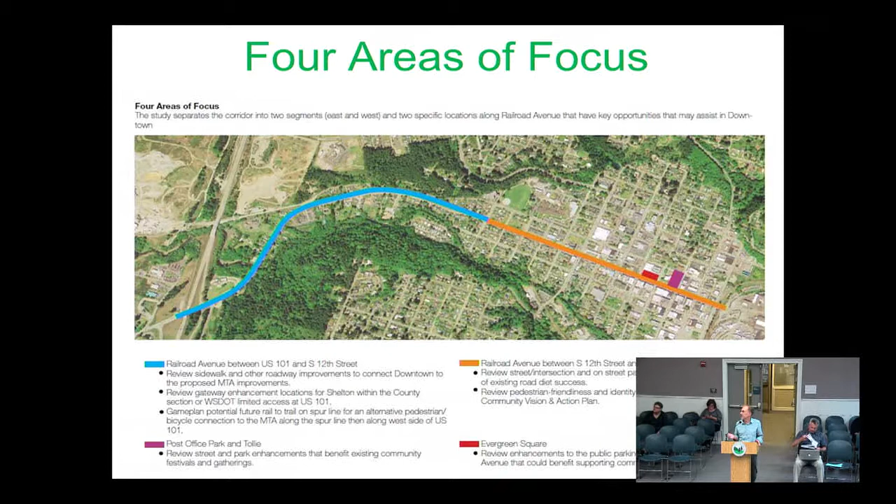So the first section, taking us from the Park and Ride on the other side of 101 to 12th, was an exercise in trying to figure out, with limited right-of-way, how we can make some multimodal improvements. I want to go through some of the things we looked at.

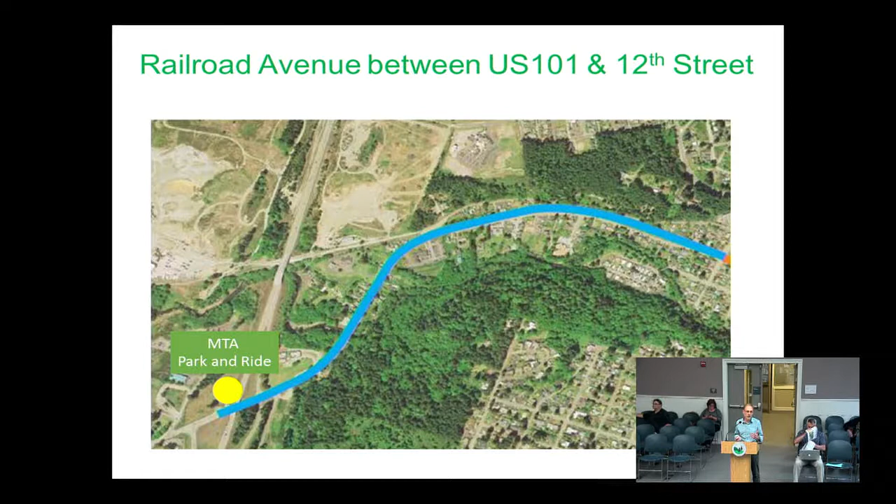There was also an additional layer of items we looked at: wayfinding along US 101, a gateway design near Deegan for visitors getting off the road and getting oriented to Shelton and downtown Shelton, pedestrian and bicycle facilities, and we also looked at the spur line from a multimodal point of view.

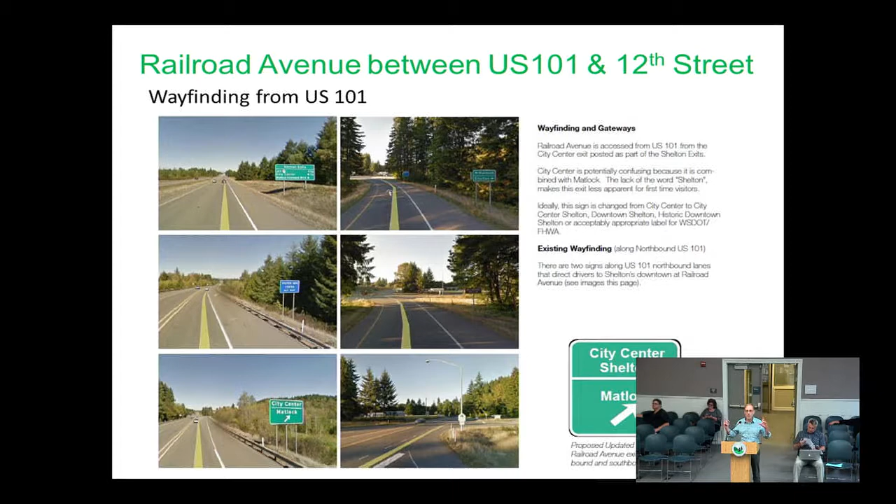What we discovered, and everybody kind of knows this within the community, is that when you're passing on 101 from north or south, there are three exits that are miles ahead of the actual entrances. In this bottom left image, there's a city center sign with a white line, and underneath that, Matlock. It isn't quite apparent that city center means Shelton.

Now, the WSDOT has, in multiple places, 'city center' plus the name of the community. So we did a little graphic on the bottom right-hand corner of this slide that says 'City Center Shelton,' and we think that would really help in understanding that you're heading to downtown Shelton.

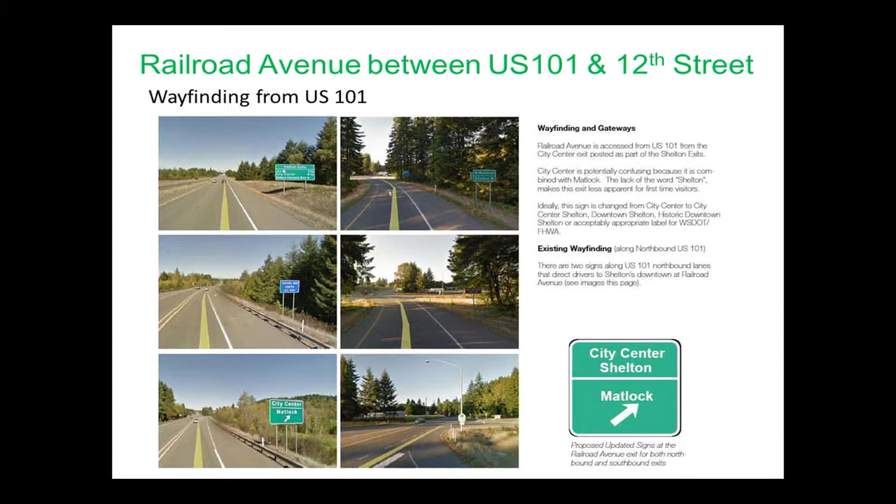Another thing we looked at is once you get off the off-ramp and head up Railroad Avenue to town, there's a little information kiosk that's been out there for about 20 years or so, right next to Deegan Road. That is a great candidate for a potential gateway sign.

This is county, it's outside the city limits, but it's within the UGA. Exactly. And so at some point this will probably be captured by the community, so why not at least capture it with a gateway sign.

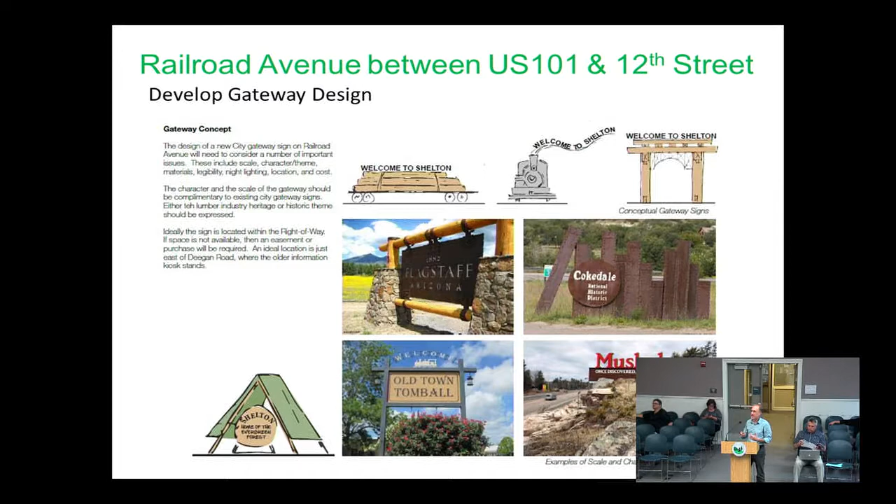For the sake of the study exercise, we wanted to build upon the 3rd Street gateway and explore other possibilities as a long-term project, or it could be short-term, that the community might look at as a means to figure out what a gateway design might be. So we just have some graphics there—no designs yet, just concepts to work with.

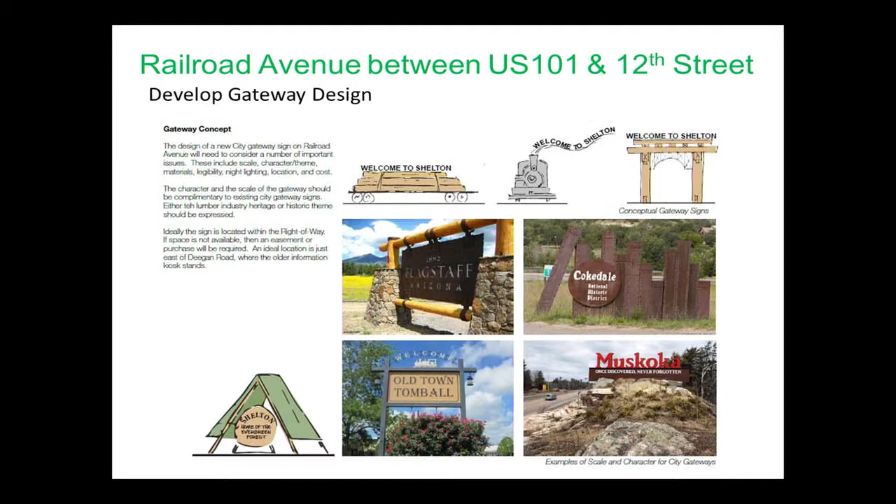And this is the pinch point along the corridor. The right-of-way widens out towards US 101, but a lot of the stretch of roadway is only 40 feet of right-of-way, particularly along the spur line. So it's a very limited amount of area that currently could be improved without having to get easements on either private property or along the spur line.

Actually, let me go back. The dilemma with the bridge, to get bicycle facilities and sidewalks, is that it would require widening the bridge, which would be a big fiscal impact. So for the sake of this study, we tried to keep it within the realm of feasibility, and this is a county section, not the city section.

So when we looked at the big picture with the group, we realized that the spur line—well, first the park and ride is the ideal place to connect. From a multimodal point of view, people could get on their bikes to that location and back. Certainly it's a park and ride lot, but we want to connect all those modes, so we could take a look at the spur line as one possibility. We know right now it's potentially activated for use, and that would be a great use for that corridor. If that wasn't to happen, at least theoretically, the study says that's also a possibility.

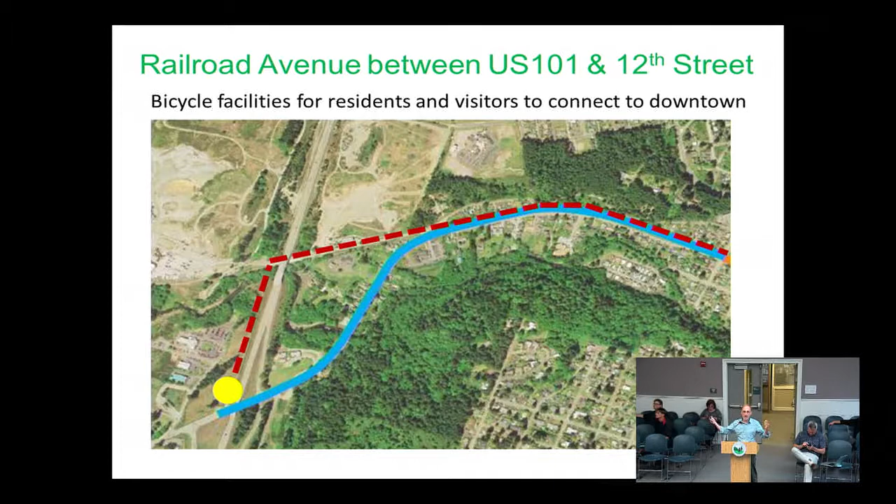There's driveways along Railroad Avenue. Most of the land use is on the south and east, but there's some on the north and west. I've only seen a few pedestrians in my minimal number of trips to the community—I saw a mom with a stroller out there. There is a need for people to walk along the corridor, but there's really no facilities, just meandering shoulders out there.

So we thought, well, what could we fit in here with 40 feet of right-of-way? One thing that became obvious is the potential of a 6-foot sidewalk, in this case on the south side, that connects most of the land uses that are bringing people towards Railroad Avenue, people coming up their drives and driveways.

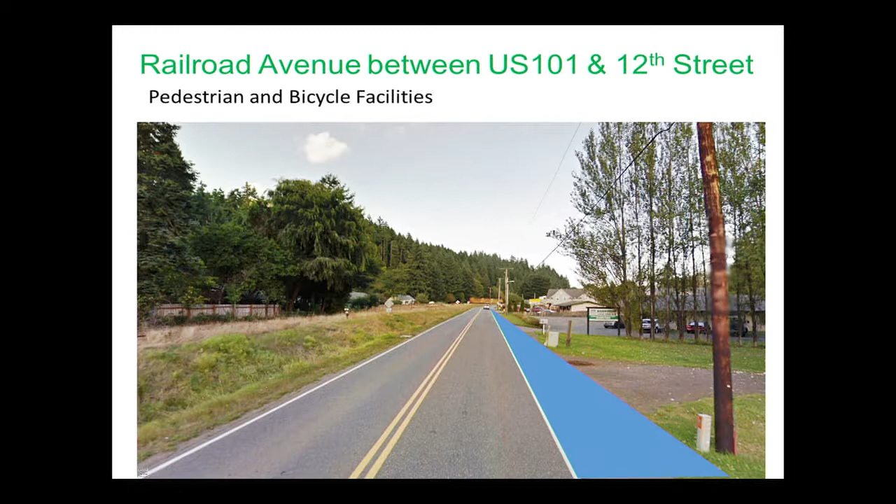And then for the sake of a big picture, long-term vision, doing something if the rail line becomes available 5 or 10 years from now. Working with the county, they're very open to adding minimal bicycle or pedestrian facilities. The bicycle facilities are hard, because if you add those—let's see, even a sidewalk on the other side—your cross section becomes wider than the 40 feet, because you also have to have the utility poles within that space.

So for the sake of the study, we tried to keep it really minimal in terms of improvements. And they support this, and there's actually enough room to not even move the poles to get in a 6-foot sidewalk.

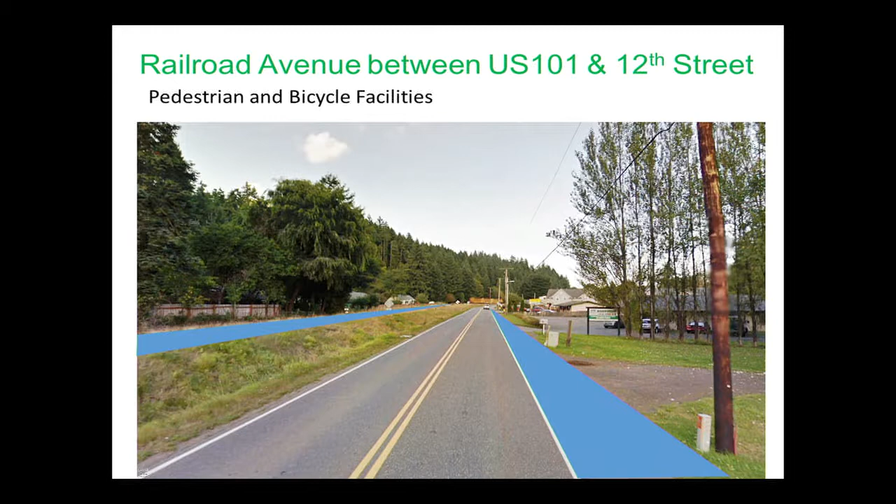There are 2 cross sections here. The top is showing existing conditions. The travel lanes are 10 to 12 feet wide as striped in the county portion. Right now the rail line isn't active, but the potential of it being activated we consider to be a good possibility.

In terms of a long-term plan, if that ever becomes available, you could have a shared use, multi-use path for both pedestrians and bicyclists. That would be used by anybody who wanted to commute, or anybody just visiting for a weekend in Shelton who wants to get out on their bikes to and from. You could do a whole thing with having bikes available for visitors or people coming off the bus with their bikes, whatever kind of scenario.

And then the sidewalk along the south side is what this section's showing, and the trail on the north side. I should back up and mention that there would be potential stormwater improvements that need to happen—you'd probably put curb and gutter where the sidewalk is to have some differentiation. So there are some civil engineering improvements that would need to happen.

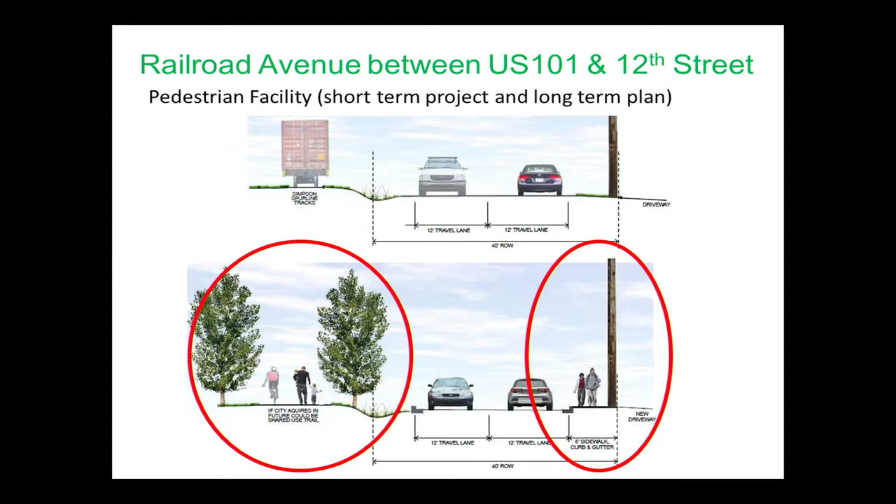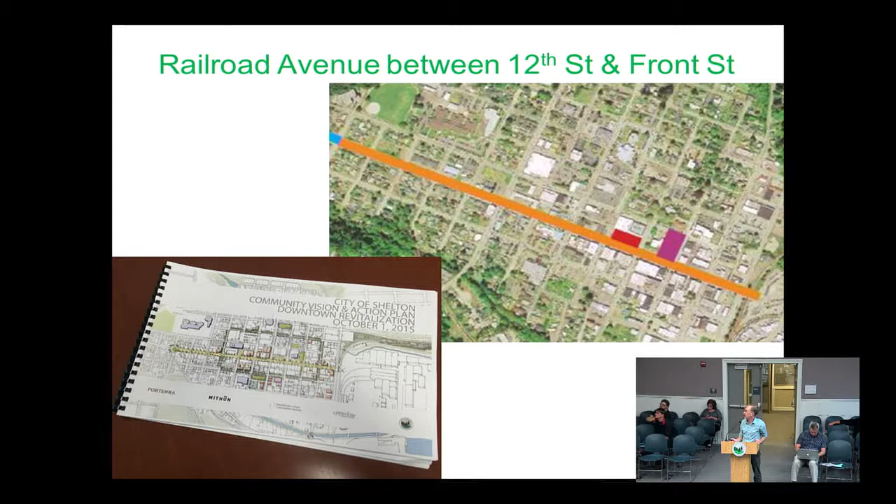All right, now the next section is from 12th to Front Street. Again, we wanted to build on the downtown action plan, and we're also going to talk about Evergreen Square, Post Office Park, and Tollie.

The number one thing we would have recommended, which is also a recommendation of the vision plan, is the road diet. The city successfully restriped Railroad Avenue, and it works just fine—4 lanes to 3 lanes still carries about the same amount of traffic, and it's much safer for pedestrians to cross. You now have additional bike lane space, so it's really a win-win-win for downtown. It would be our number one recommendation for any downtown improvement, and that's our company's focus.

On-street parking was looked at in the initial phase around angle parking, and that was not considered a viable option. Parallel parking is available and that works great. Crosswalks are demarcated in a nice colored painted area, so those are very strong crosswalks now for pedestrians and for vehicles coming down the corridor, so drivers know there could be pedestrians there.

We'll look at enhancements around Evergreen Square and Post Office Park in relationship to community activities.

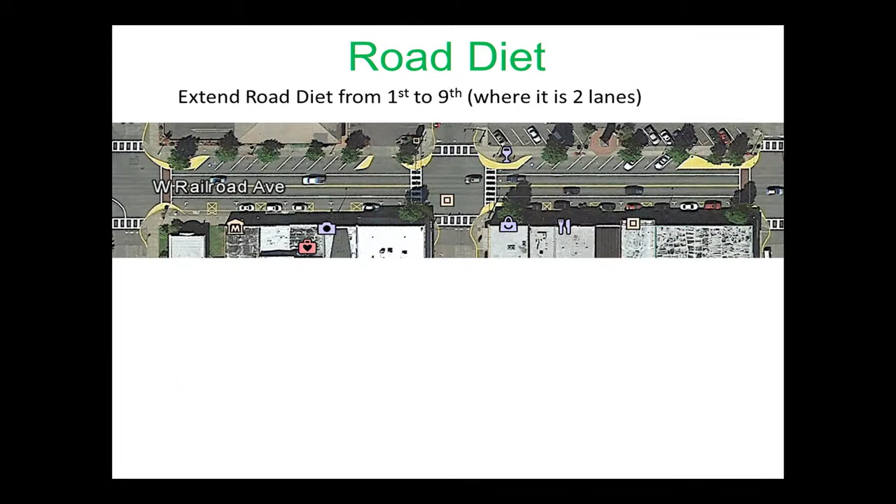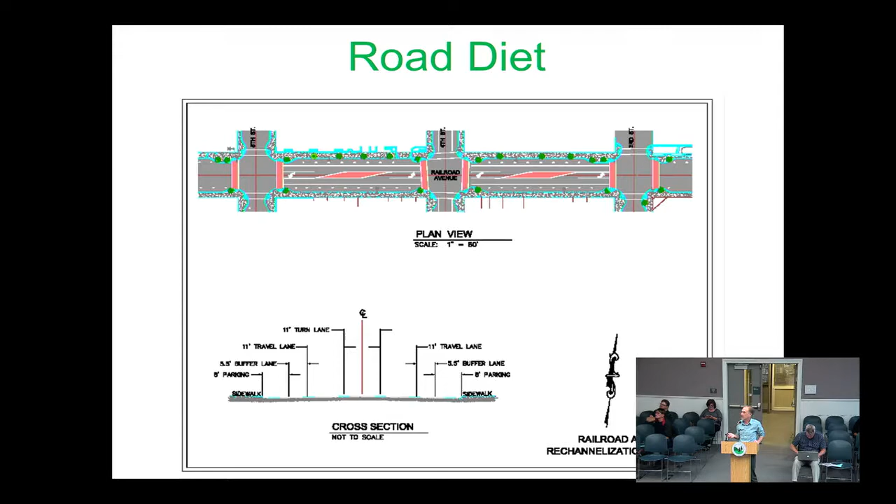I hadn't realized it was fully striped when I did the slideshow. I was showing you before, and I wish I had the after picture, but I don't. I'll skip that—going from 4 lanes to 3 lanes—and these are the images that were used to actually do the striping. After driving it both directions and walking along it, I would deem it a full success.

This image was just to show that if you wanted to create a variation to the asphalt out there, there are different in-pavement imprints that could be done. They're still flush for parades and things like that. So you already have the color—it's just a matter of whether you want to texturize it.

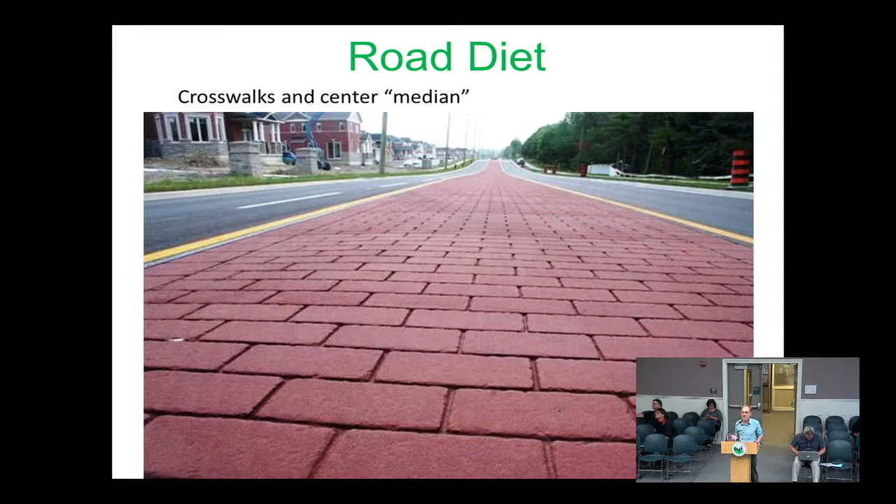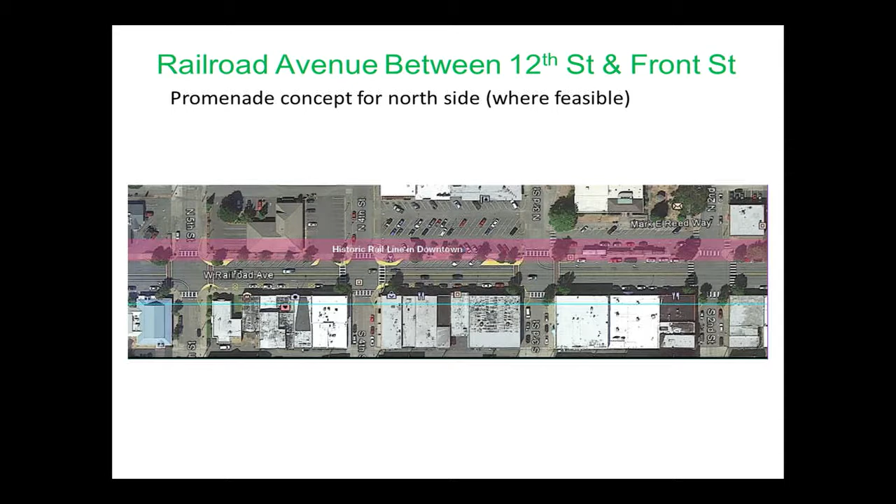The purple stripe in this image, again from a plan view, and the center image is right where Evergreen Square is, shows that this space is available. Just to the west is the bank, and that space isn't available because that newer building encroached within that area. But from block to block, you might have these opportunities.

Evergreen Square is a public parking lot, pretty much just used for parking right now. In these downtown cores, for revitalization and community activities, you really look for flexible space, and this is a fantastic candidate for making it more of a flexible space.

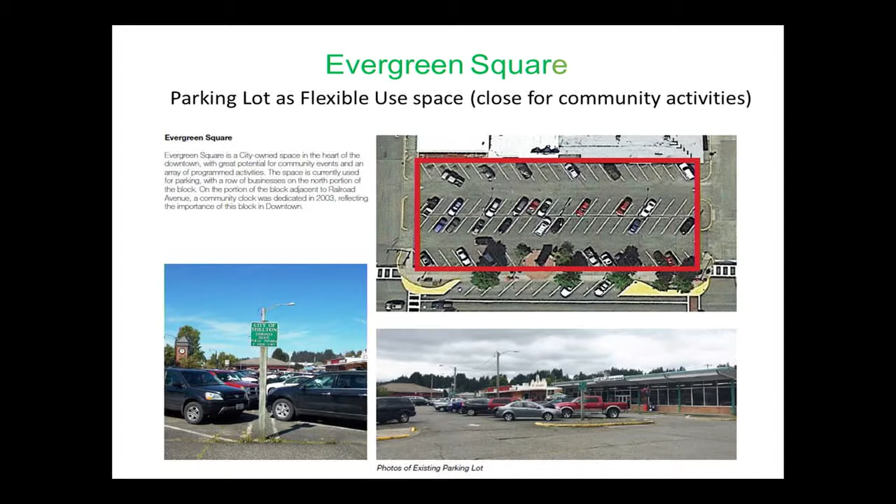One of the things we've seen in other places is taking a parking lot and making it look different than a parking lot—letting it function as a parking lot until you have an activity, where you get the cars off of it and then hold other activities.

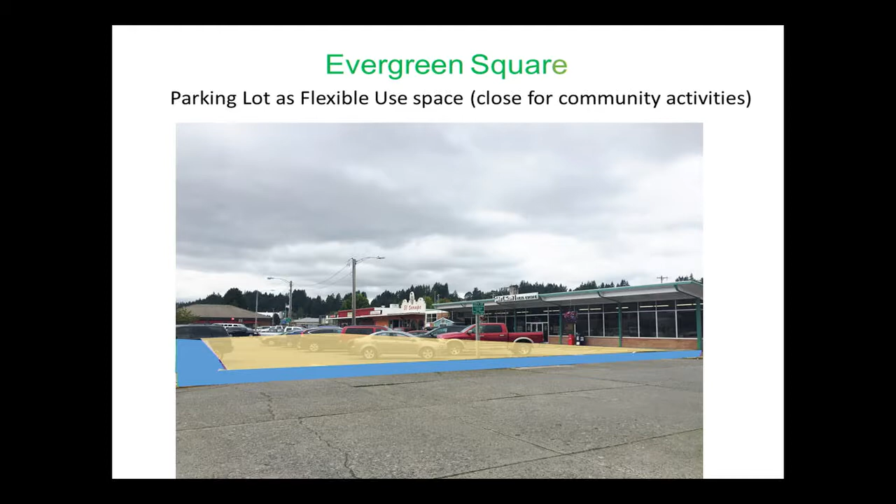Before I show pictures of that, I want to point out that the sidewalks aren't continuous along there, and those improvements would be nice. Maybe some of that parking could go away along the west side as a concept, and the center part of the parking lot—either as asphalt or some other improvement like concrete—could still be striped as a parking lot but have a different, larger plaza feel.

So conceptually, that could be a short-term or long-term project for Evergreen. The other aspect is to take a look at downtown parking along this stretch, because the clock tower is actually a focal point in downtown—it's been a place where the community celebrates and memorializes different events. If some of that on-street parking came off, we could create a wider sidewalk zone, a promenade that could extend over into the parking lot area.

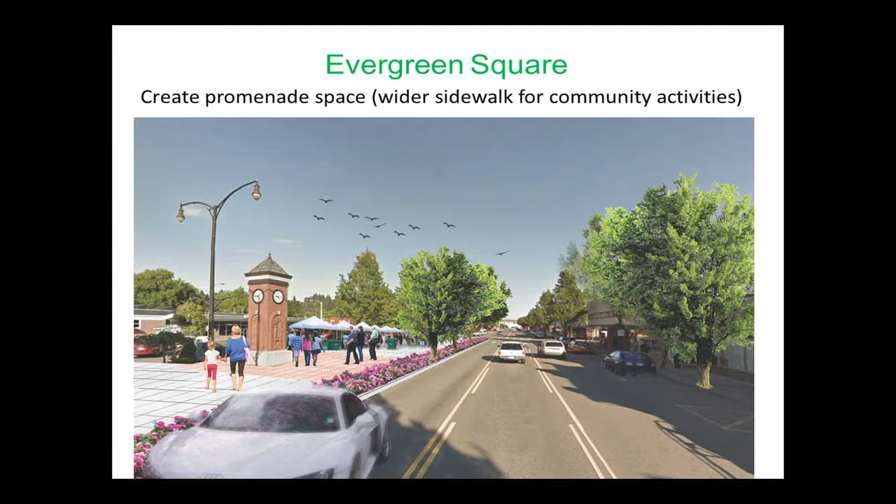Post Office Park in Tollie: when we looked at the space between the gazebo and the Christmas tree, it's pretty hard to improve what is a fantastic celebration, so we didn't have too many recommendations about the park space itself. But looking at Railroad Avenue, and trying to increase Tollie's presence on the corridor with space for visitors and citizens to gather, that space is at a premium along there.

I'll show you some pictures. First, the concept with Post Office Park is to take the existing green area, and if we took off a few more of those parking stalls—which I know are heavily used for the post office—perhaps we can get another connection with a bit more green that brings the park right up to Railroad Avenue. Then if some of that parallel parking along Tollie was removed, we'd have more space for a wider promenade sidewalk.

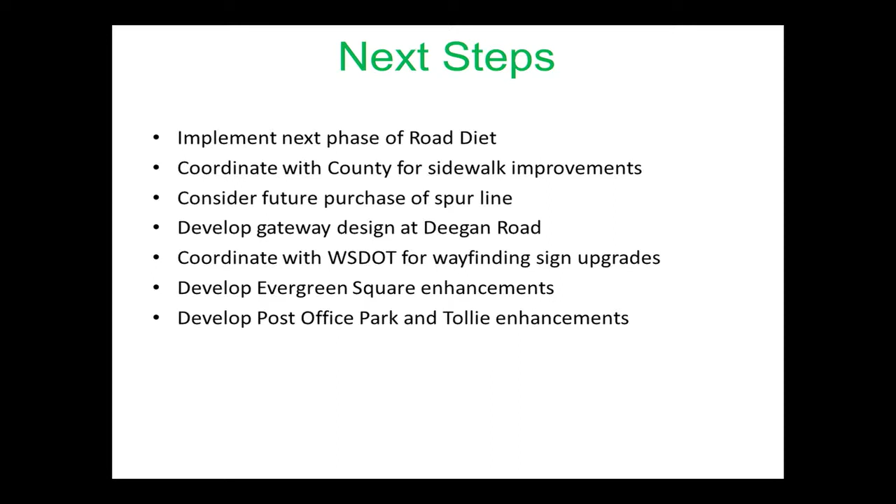So my number one bullet is done: implement the next phase of the road diet—it's been done. That was the short-term project most important for the corridor.

The next would be to coordinate with the county about sidewalk improvements, at the very least to have some pedestrian facilities people could get to. For those folks on the north and west side of the corridor, we'd have to figure out where crosswalks could take them over, so we could have safe crossings. That's important.

The spur line and its potential activation—if things don't work out with that, then it would be maybe acquiring a portion of it for a potential rail-to-trail. Developing a gateway design at Deegan Road would really enhance Railroad Avenue in the downtown. Coordinating with WSDOT for wayfinding signage would be an easy early win to get those signs changed. And then working with the community on developing some variety of enhancements to the sidewalk spaces and parking lot use at Evergreen Square, and also Post Office Park and Tollie.

So really everything the study is bringing forward supports the action plan, trying to find pretty easy wins, short-term and long-term, that really benefit Railroad Avenue and the community. So, any questions?